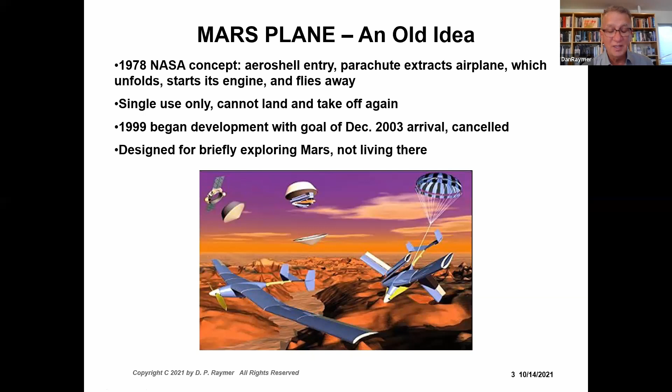I was briefly on the faculty at California State University at Northridge a number of years ago, and we had a student design project that designed and built a Mars plane. Here it is, out in the Mojave Desert testing it. So it's certainly something that is possible and feasible.

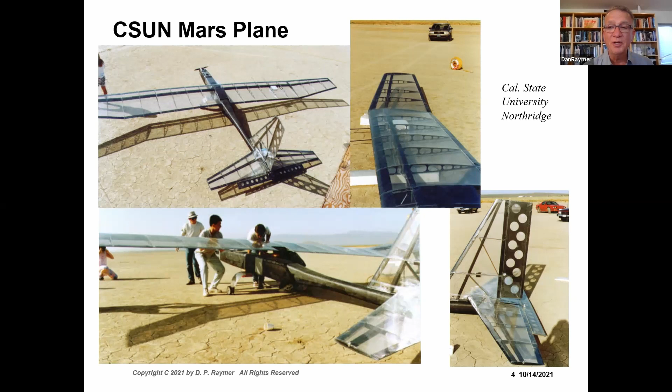But again, it was an unmanned airplane to be launched from the Earth. My thought is that eventually people are going to be living on Mars. That's certainly the plan. And when they're living on Mars, they'll be needing a way to get around, maybe for exploration or maybe to go from one Martian town to the next, hopefully someday. So I started thinking about that when I was invited to give an AIAA paper, and decided to do this as an AIAA presentation.

So anyway, I just started thinking about what would be required, what would be a good set of design requirements for a manned airplane that flies on Mars. And I decided the good old Jeep from World War II turned out to be a very good, very useful vehicle. Some people say it was one of the weapons that won World War II. In any case, I decided that would be a good starting point, as good as any I could think of. So: 2 people or 500 pounds, kind of go anywhere like a Jeep.

And a fair amount of range. The Jeep had 260 nautical miles range. That certainly seemed like a good number. I just wrote that down and decided to use it.

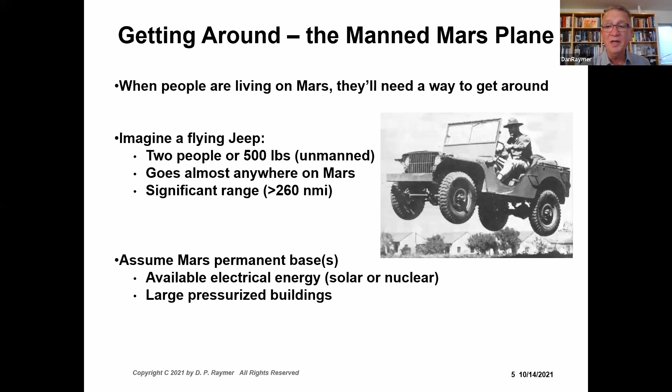In my design study, I'm assuming that there are already permanent manned bases on Mars, and I'm assuming those bases have lots of electrical energy, so getting energy isn't my problem. I'll assume they have nuclear power plants or maybe huge solar farms if that's feasible. But in any case, we'll assume they have that, and large pressurized buildings. Other people have talked about the architecture of buildings. Well, just make sure you make one of them like a hangar, because I want to put together an airplane in that great big facility.

So with that in mind, I put this design together, and let me start at the end and then work backwards. Here's what it looks like in flight: a very big wing, of course, four electric propellers. And it gets closer, you can see the body pod there. It's coming in, ready to land. And it fires up some jets, some rockets actually, and it actually lands vertically on rocket thrust.

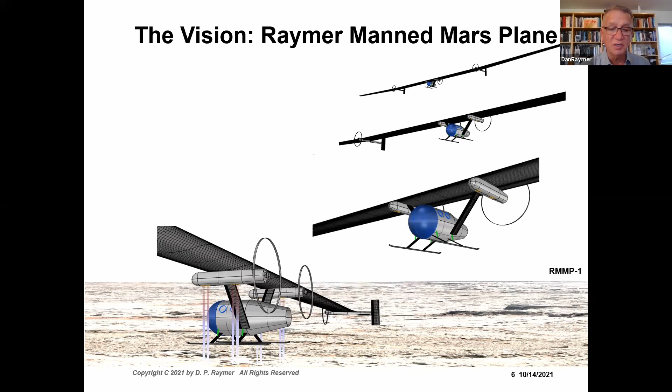And then it takes off vertically on rocket thrust, accelerates, and flies away. So that's the basic idea of this thing. Some more of the overall operational concept.

This is just Dan Raymer making up stuff, but I think it makes sense. First of all, it would be optionally manned. You really wouldn't need a pilot. Two people could fly in it, and they can pretend they're pilots. We might even give them a video joystick, kind of a game controller, so they can steer left and right and tell the system, okay, land here. But all the flying would be done by computer.

And you could also fly it unmanned. Just put 500 pounds of stuff into it, push a button, and it flies where you want to go.

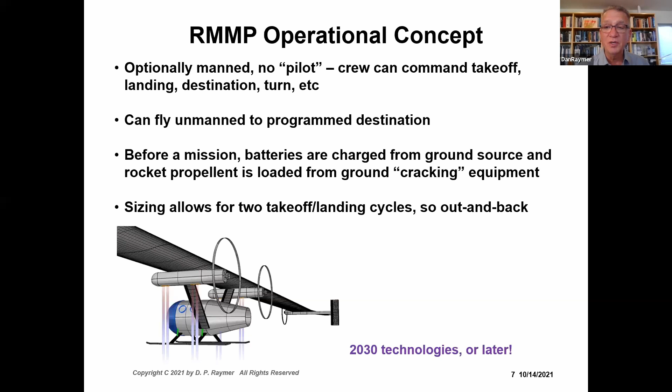We'll assume that it is fully charged from a ground source. The batteries are fully charged, and also rocket propellant is loaded using ground cracking equipment. I'll talk briefly, but it's a carbon monoxide/LOX rocket, and that can be cracked out of the Martian atmosphere. And I did the sizing to allow for 2 takeoff and landing cycles.

So you take off, you fly out, you land, you take off again, you fly back, and you land at your initial base. And that's all done without any further refueling. All right, so that's the basic idea.

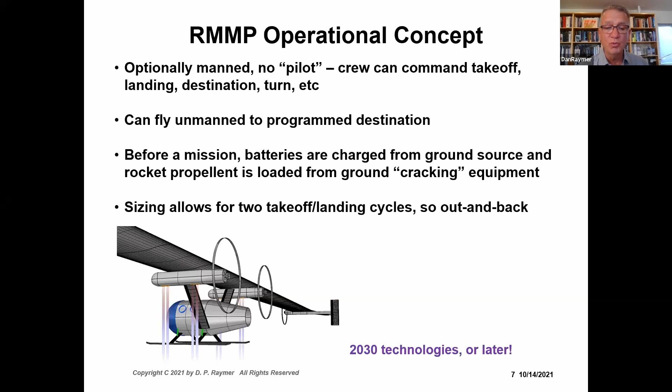I'm also assuming 2030 technologies, and 2030 is getting close at a rapid rate. Maybe I better make that 2040. Anyway, whatever it is, it's more advanced than we have today, but not crazy advanced. I'm just assuming we can do a better job at designing laminar flow airfoils, and we can do slightly better in terms of structural weight and stuff like that. No great big magical things in there.

Okay, design drivers. I made up a bunch of design drivers and some assumptions. Some of the drivers, of course, the atmosphere is ridiculously thin, so you need a huge wing and you need to fly fairly fast to get enough lift to fly like an airplane. You do have the advantage of the reduced gravity, so you don't need as much force to carry the mass. The weight is less because of the gravity. So in effect, you need about 23 times the total lift for a given speed on Earth.

Another driver is the propeller tip speeds. The speed of sound is lower on Mars, and we're probably going to have large diameter propellers. So it's just one of these things to keep in your mind if you try to do a design of your own.

I wanted a pressurized cabin, just like Jeff Bezos's vehicle. I don't want them having to get into spacesuits and spend all day with a helmet over their head. So pressurized cabin. I want an excellent field of view. You saw the bubble in front.

Vertical takeoff because there aren't any runways, and the configuration needs to give pretty good ground clearance because we're going to land off base. We're going to land wherever we think there's a spot. So I want the wing and propellers and everything else high up off the ground, but I don't want the people having to climb down a ladder. And you'll see how I solved that.

Okay, assumptions and decisions, and these are things that would be great trade studies later. So don't ask, did you look at a helicopter? Because the answer is no, I didn't. I just made a guess. I did a vehicle that I think would work, and I'm pretty sure it does. There may be a better vehicle. There may be a better approach.

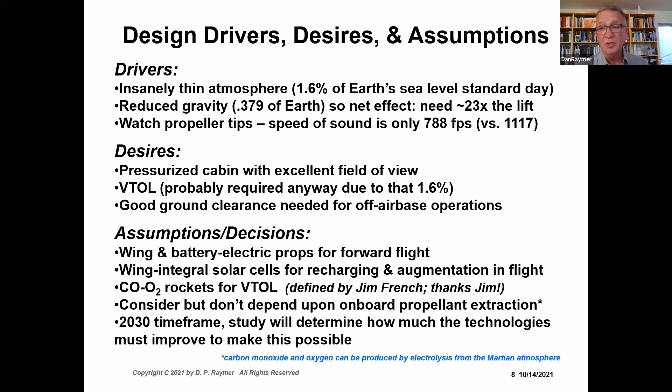Jim wanted to do onboard propellant extraction, and he really fought with me saying, oh come on Dan, stick this gizmo on it, so when it's sitting on the ground we can crack out more propellant. I said that's a great idea, Jim, we'll put that in the B model. The A model is fully loaded with all the propellant you need, but it's certainly a possibility. In terms of cracking out propellant back at a main base, that's pretty easy. People will do it. Part of the study is to find the technologies necessary.

So this is the design I put together. I started out wanting to come up with a pressurized shape that'll hold two people very efficiently, and what could be more efficient than basically an autoclave? So it's shaped like one, a round cylindrical piece with a hemispherical cap on one end. Not shown here, there'd be a cap on the other end too, probably one of those insulated shapes. I added that to a later version of the design.

Deliberately, the pod is low and the wings are high, connected with a V-strut. Yes, I know it looks like the Starship Enterprise — that wasn't deliberate, and especially wasn't deliberately timed considering what happened yesterday. But the reason is so that if there's a crash, the structural support of the wing won't puncture the pressure vessel. You don't have the weight of the wing, but you have all the mass and inertia of the wing, so if you make a hard landing it'll break away and not puncture the vessel. That was my reasoning. Also, it looks cool.

Where the struts connect to the wing, there's a pod. The back of the pod has the pusher propellers, and also the rocket motors for vertical takeoff. They're angled away a little so you don't throw dust on yourself. And of course, helicopter-like landing gear. There'd also be skids out near the wingtips just to hold the wing up. I decided later we really are going to need rockets out near the wingtips also for better roll control during takeoff and landing. So that's the basic idea.

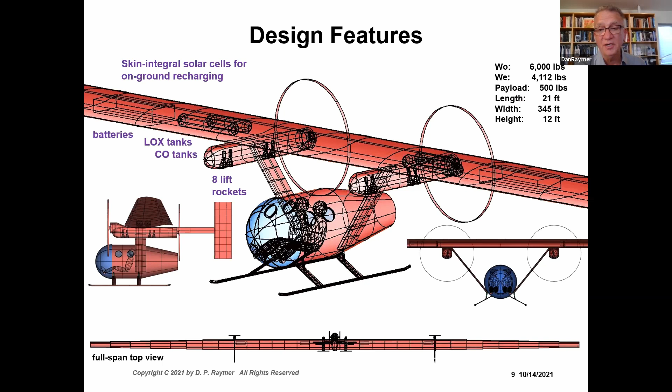This illustration — I should have mentioned on the first slide, I had an international team volunteer to help after the first presentation. Since they were all doing it for free, I didn't try to run them tightly or tell them just what to do, so they all did what was interesting to them, and I think it's great work. All of their work is available in the paper we did and also on our website.

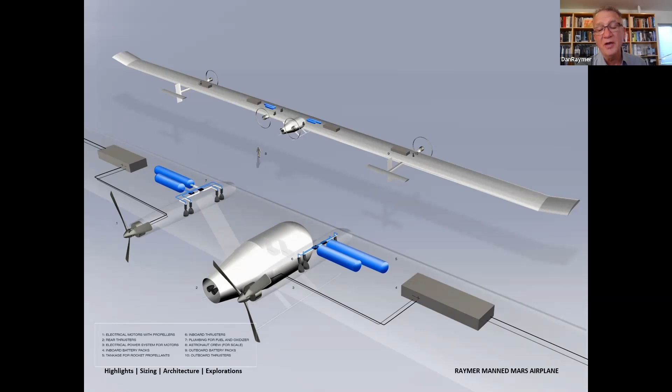Anyway, this shows a little bit better what the propulsion system looks like with batteries. These square flat boxes are batteries, and then there's the vertical takeoff jets in those pods. I did a little bit of analysis here, some of it with spreadsheets and some with my RDS aircraft design software.

First, I did a trade study trying to figure out what kind of speed I needed to be looking at. When you look at vehicles with huge wings like this, you always think, oh, that's a slow vehicle. But in the Martian atmosphere, you have to go pretty fast. So after looking at some trade-offs, I finally settled on 115 knots as stall speed, which sizes the wing. That gives about 150 knots as a good cruise speed, where you start to get into the sweet spot for lift-to-drag ratio on the airfoil. So that seems about right.

I made an assumption of a 6,000 pound gross weight, and we went through the sizing on that basis. It looks like it's probably about right. Of course, with more funding later, we should do a very detailed bottoms-up sizing study, but that seems to be about right.

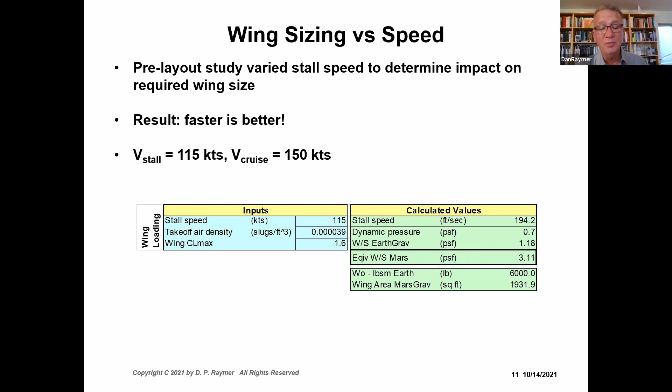When I started this, myself and a lot of other people thought the best way to land was a deep stall — to pull into a deep stall at a fairly high altitude, let it stabilize coming straight down, and then just before you hit the ground, turn on the rockets.

And it turns out if you let it stabilize coming straight down, you're going pretty fast. There's not much air there, even with this huge wing, so you don't flutter down like a feather, you drop like a rock. It actually took a lot of time and rocket fuel to catch the fall. It actually looks like it's better to fly in at a fairly low altitude, just over stall speed, then basically pull back and slow down and shift to rocket lift. That seems to be a better approach.

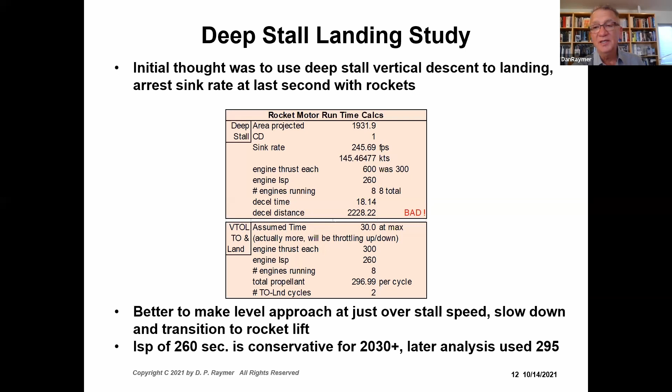Okay, did some classical aerodynamic analysis with my RDS software. It looks like somewhere around a lift to drag ratio of 40 should be attainable. That's a little questionable because of the very low Reynolds number, so it needs more work on that.

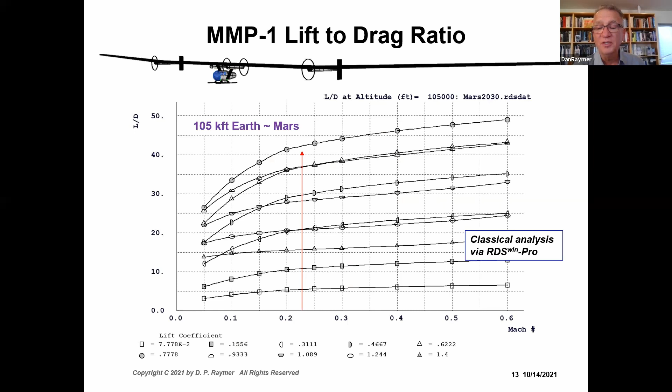We did some CFD, I'll show you in just a bit. I did do a weights buildup using a combination of some statistical equations that don't apply very well, a lot of ratio analysis, and some just Dan Raymer guesses. Certainly it could wind up heavier than this, but I think it's about right, and I think I was pretty generous. Things like a wing weight of almost 1,900 pounds - that's not nothing. Anyway, it all needs a whole lot more work.

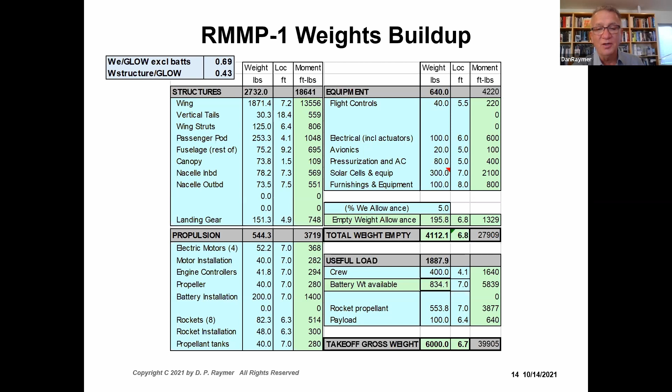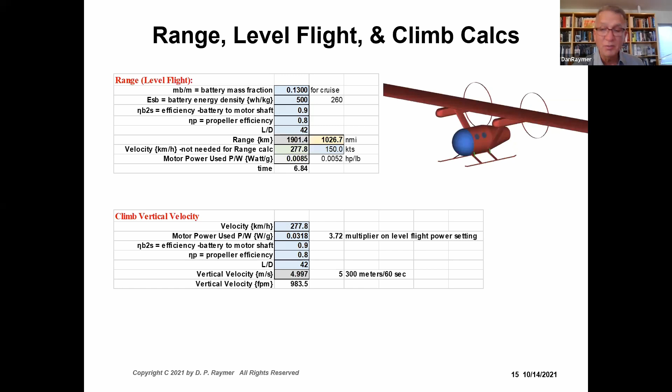I did get some work done by the international team, which I'll show you in just a minute. Based on those numbers, I ran out and found a total range of over 1,000 nautical miles - half of that, 500 out and 500 back, which is well in excess of my 260 goal. So I felt pretty good about that. At a reasonable vertical climb velocity, although we don't have to climb very high, just high enough to clear mountains and such. So it seems to work, meets stated requirements.

One of the volunteers did a dynamic analysis of the takeoff, taking off vertically to about 30 feet straight up, and then beginning to accelerate forward using a combination of propellers, and there's two extra rocket motors in the back of the body pod. That combination accelerates you, and by the time you're at about 200 feet, you're just over stall speed. You can shut off the vertical thrust engines and fly away on wing lift. That looks like it works.

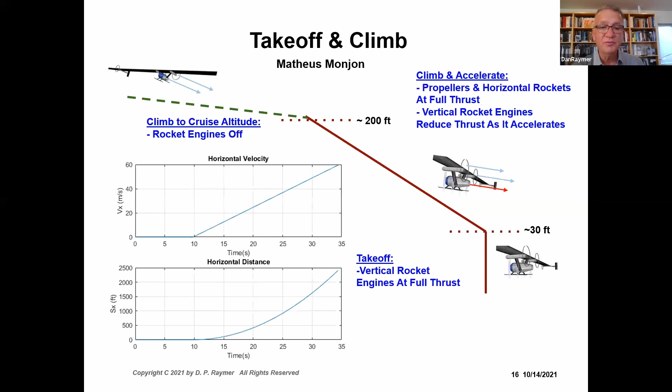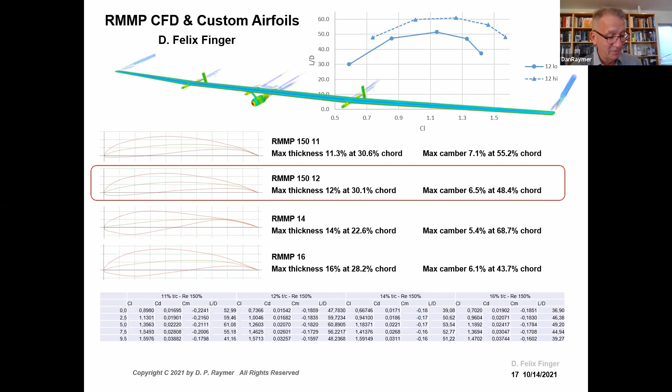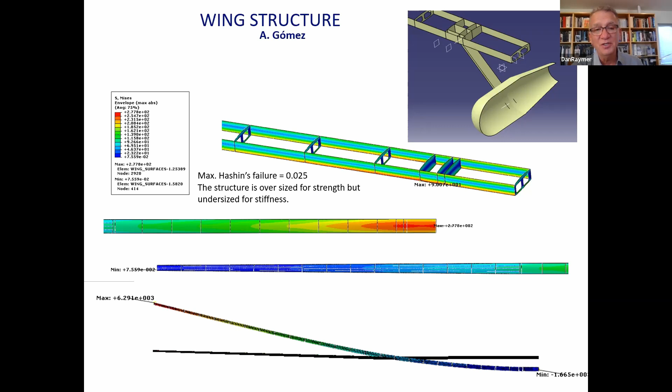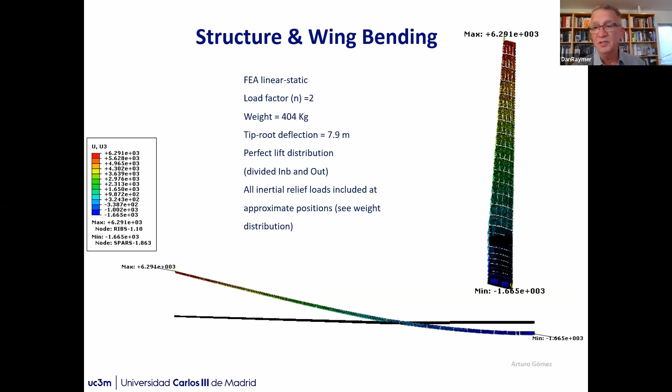But it's okay, as long as it's taken into account. And he did a weight analysis and came up with 400 kilograms. So that was less than the weight I had estimated, but this doesn't include all the details and fittings and that kind of stuff.

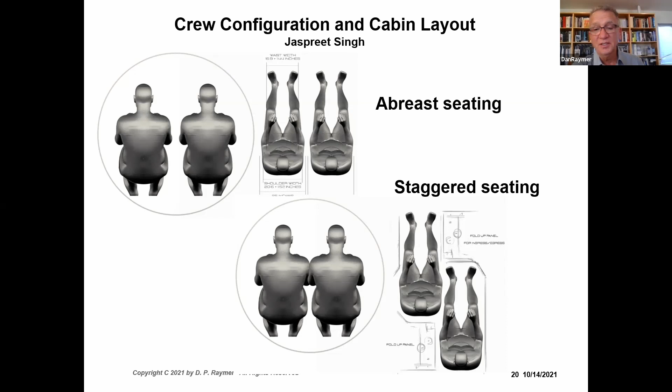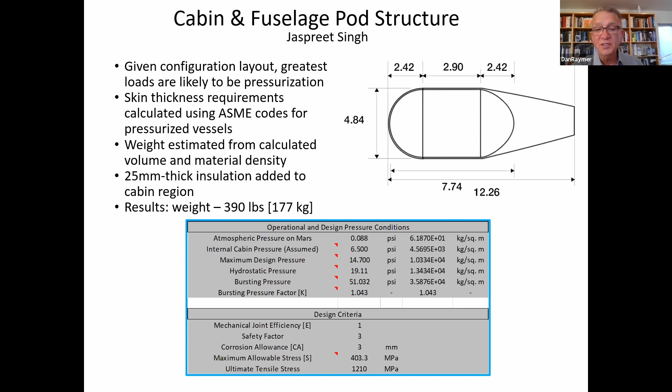We also did an analysis of the weight of the body pod itself. There's closed form equations in all the textbooks. Based on the loading conditions I gave him, he came up with about 390 pounds for the body pod weight, including insulation.

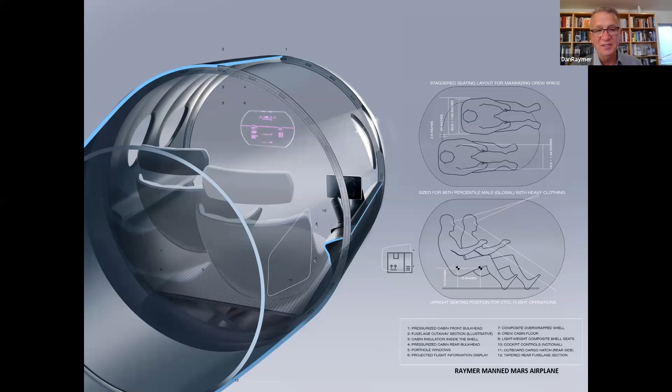So it's a little bit more than I was using, but not by much. We also did some design work. There are actually 2 different volunteers who did interior design, and I like them both, so we'll decide later. This is one of the designs, taking advantage of the staggered arrangement we discussed.

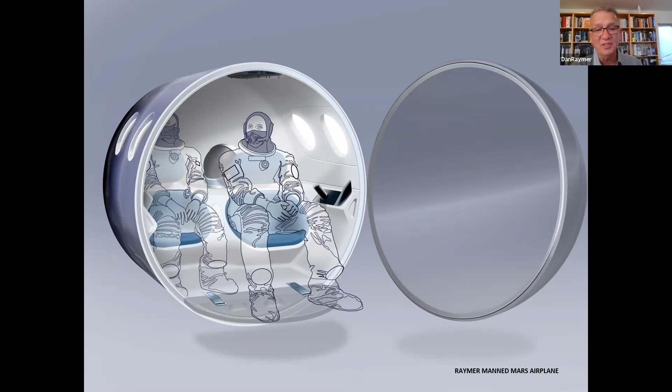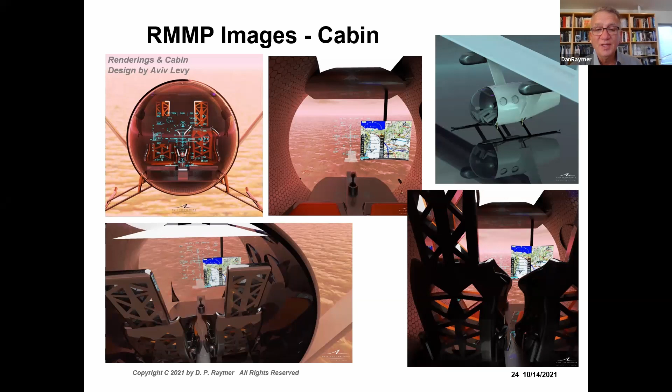Another one of the volunteers did these renderings and showed heads-up displays sent onto the hemispherical dome. I kind of like these chairs, pretty cool, very lightweight chairs, and they also have the advantage of easily folding away. I think that's good if we're going to be using this for cargo sometimes, as well as for flights.

A little bit more of that arrangement, and actually I think they're quite nice, nicely done. Then finally we got some very nice renderings showing the vehicle in flight and a much better illustration of how it flies. Here it is coming in, and it's already starting to slow down.

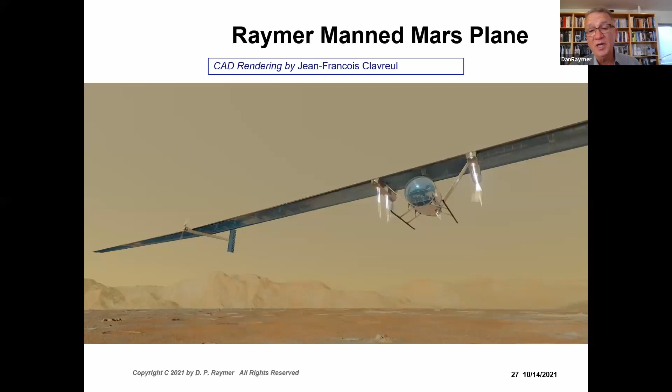We're transitioning the weight to the rocket thrust. We'll basically set the wing at CL max—there's no reason to go beyond CL max, just set the wing at CL max—and let it slow down and start going more and more to rocket thrust. We could use the propellers to slow down more quickly, or we could possibly use them regeneratively and store some electricity back in the batteries and slow down also.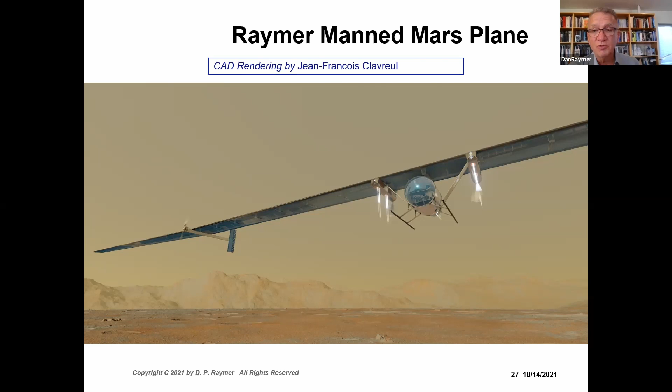There it is, coming in closer, with a couple of people inside that hemispherical dome. Rockets firing. There it is on the ground, with 2 people out, as we looked at it earlier.

So anyway, that's the basic concept. Obviously this is an early look—nobody needs it yet, nobody is on Mars yet. I'd call this more of an existence proof than anything else, although I personally think this design stacks up rather well. It looks like it works, but obviously before you built this on Mars, which might not be for 20 more years, you'd do a whole lot more designs, a whole lot more work. Who knows, maybe it'll look something like this when somebody actually builds this vehicle.

This was done, as I said, by this international team of volunteers, and the first slide showed who it is. If you go to my website, down here at the bottom, there's a page with a whole lot on this project—illustrations, the reports by the volunteers who did a whole lot of work, way more than I could show you in 20 minutes, some view graphs from previous presentations, and a longer video presentation I did a while back.

So it looks like it works. I think it works, and for the purposes once we have people living on Mars, I think we're going to need something—plus the fact I think it'd be a lot of fun to fly. So that's the presentation, and I'm happy to answer questions.

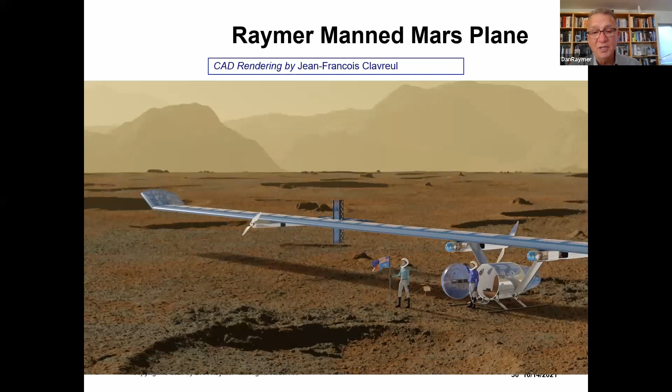Another question: how do you solve stability and control without an empennage? It does have an empennage, but the answer nevertheless is magic—but we love our magic. It does in fact have vertical and horizontal tails. I didn't mention it, but I had to add the horizontal tails because the optimal airfoil had such a camber back towards the trailing edge that it would be quite unstable. It would be possible but difficult to artificially stabilize that. And of course, you don't want to fix it by moving the center of gravity, because then you deflect the trailing edge for control and you don't have the right airfoil anymore. So that airfoil led me to think we probably can't get away with a tailless airplane.

And then we have a question from AltSpace VR. Is it possible for the person from AltSpace VR to ask their question? I'm sorry, is it possible for them to ask me a question? Yeah, sure, ask me a question—that's why I'm here.

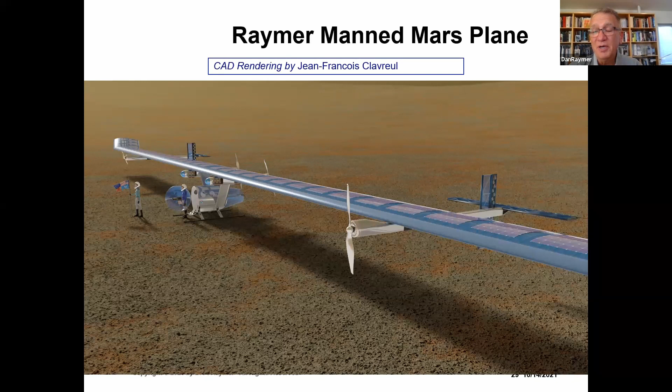Another question: could this flight plane be separated from the airfoil and then travel on land to move around, getting to its destination? Well, that's kind of a neat idea. Actually, looking at it, you could probably have a quick disconnect right where the struts attach to the pod, and have some simple little struts come down out of the nacelles to hold it in place. Then all you have to do is add wheels and a drive system and drive it away. The problem is you're adding weight—it would probably add enough weight that the whole system might be unfeasible just because of the extra weight. But physically looking at it, yeah, maybe so.

Given the high winds on Mars, did you or your team look at the flight envelope, or does the rocket landing technique mitigate landing and taking off in high winds?

Well, I saw that movie too, where the winds were blowing. Was it Matt Damon all over the place? I think that was in that movie. Oh yeah, The Martian.

But the air is so thin there, I'm not really sure you get that kind of dynamic pressure, even if the wind's moving at 100 miles an hour. We're flying at 150 knots, I guess, and the dynamic pressure is about 0.7 pounds per square foot, so that's not very much.